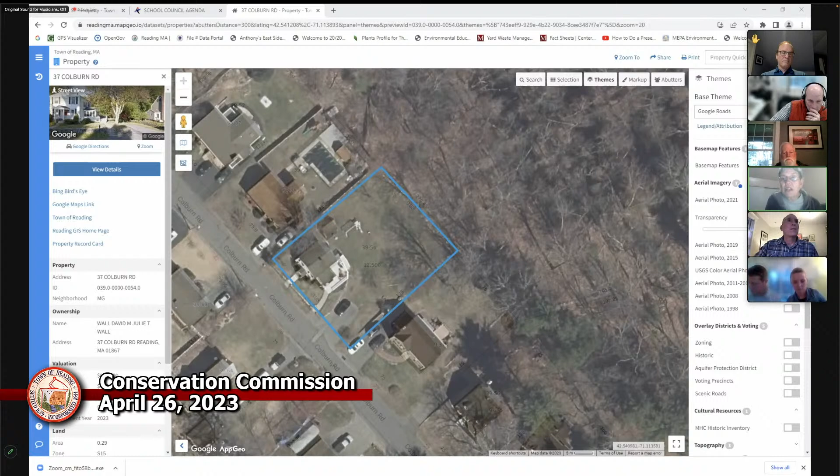So that takes us back to Andrew's question, whether normally that 25-foot line where you have marked it on your map, we would like to see native vegetation and not just lawn all the way up to that line. For existing properties, we don't ask people to fill that entire 25-foot line, but Andrew has a good point that if the wetland line really does go across that back corner of your yard, would you be willing to consider putting some native wetland vegetation there. Chuck has a list on the website of the kinds of vegetation you could pick from: shrubs, trees, etc. Sure, yeah, there's no issue with adding that. It would probably help make it look a little nicer back there anyway.

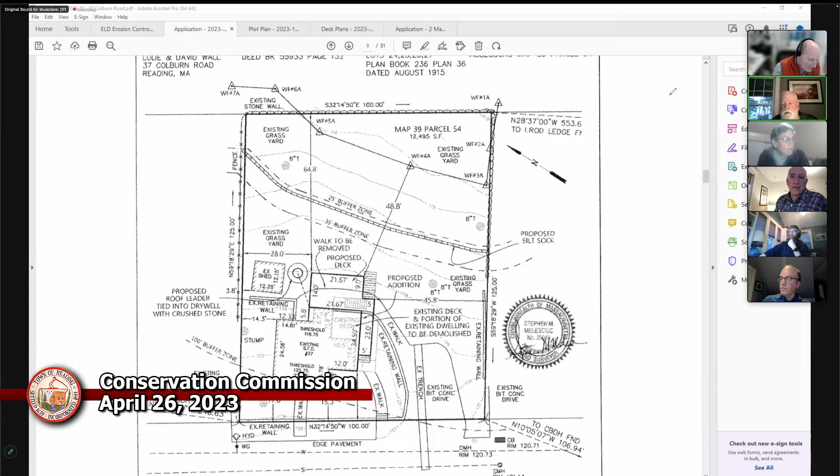Do we want to talk conditions for Chuck to write down before we vote? I have two trees, six shrubs, a mulch sock, and clean up all debris—Chuck, did you get the debris removal too? Yep, clean up the debris. Alright, so that's three conditions. They were planning the soil stockpile to be on the driveway, so let's tuck that into the mulch sock line—mulch sock following the topography of the yard.

Chuck: the only thing I'd add to this planting is to have the grass out there and the trees—you probably should do some ferns, shrubs, and trees, and try to create a habitat, improving on the lawn rather than just adding trees to it. I know there's a stone wall in between, but I think it would work in well. Maybe consider getting a herbaceous layer, shrub layer, and then the tree layer. Remember for the applicants that it's a wetland, so red maple would work, although we had a suggestion not to plant large trees—so maybe silky dogwood or something like that.

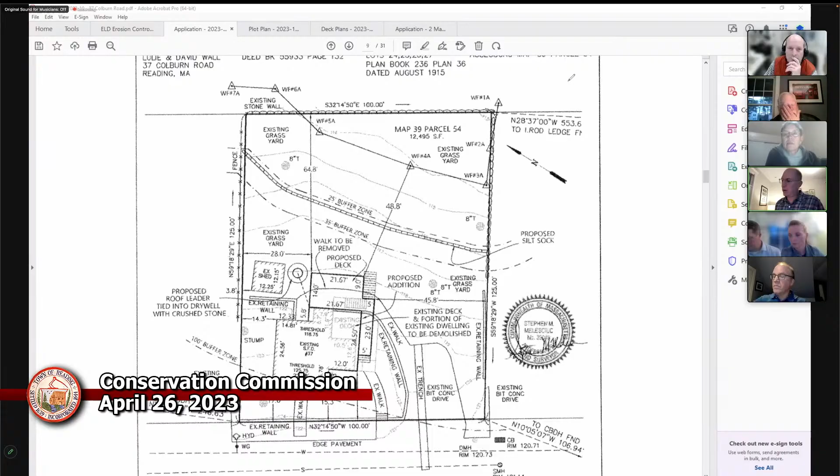There's a motion for negative determination, which is what would be needed to allow the project to proceed. Brian Bowe in favor. Bill McCants in favor. Andrew Driven in favor. John Sullivan in favor. Martha Moore in favor.

Okay. Oh, did we need to close the hearing before we had the motion on the negative determination? Typically you close the hearing first. Oh, sorry, I didn't catch that. All right, so anybody want to make a motion to close the hearing so we make sure we've got everything done properly?

This is Brian, I'll make a motion to close the hearing on 37 Colburn. This is Andy, I'll second that, to keep it simple.

Brian Bowe in favor. Bill McCants in favor. Andrew Driven in favor. John Sullivan in favor. Martha Moore in favor. Okay, so we have closed and issued a negative determination for 37 Colburn.

We went back in time there. All right, thank you. Not quite the order we were supposed to do it in, but we've covered all our bases now.

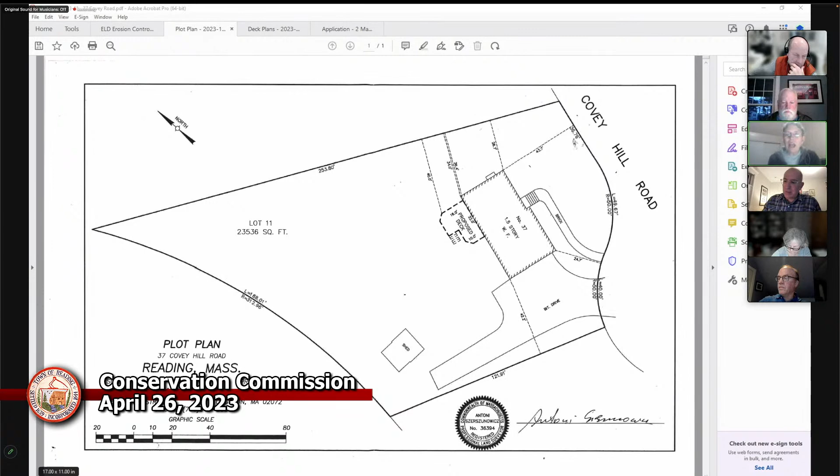One other thing, I noticed that midway between the place that says lot 11 and the shed, there's a large patch of an invasive plant called garlic mustard. That's something that is blooming now and is easily located, and it's an invasive plant that alters the soil. So if the homeowner had interest in keeping that out, this is the time of year to pull those. It's a pretty pesky invasive plant that takes persistence to keep from spreading.

Okay, anybody want to make comments on the project? Bill? Actually, first, just a question, Martha, looking at the plot map, about where did you see the garlic mustard invasive? Do you see where the shed is? Oh yes, and then about as far back as the shed, but coming straight back from the proposed deck, kind of out in that area. Yep, there's a big patch of it. Thank you, I was just trying to get a visual on it, having seen it on Saturday.

Also, one can't control the slope of the property, but I was actually very pleased to see how relatively flat it was in terms of any work being done in this area. You'd want the usual safeguards, but it didn't seem to me that this project was going to present the kind of risk that sometimes occurs when you have a steeper slope. But that was my only other comment.

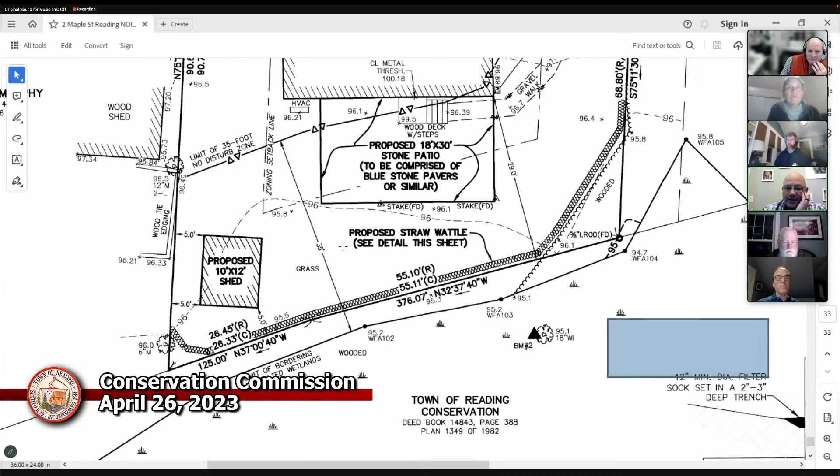I'm just going to scroll up a little bit. Maple Street is up here, this is the frontage to the road, the front yard, the house. There's a backyard, and in the back of the house is where we're proposing to do the work. This is a fairly modest house on a fairly constrained lot in terms of size. When John came to us, he told us he wanted to construct a deck on the back of the house and put a shed somewhere in the backyard.

Let me start with the resource area. There's bordering vegetated wetland down here, just off the property, and here's the property line itself. This house and yard was constructed in 1953, and it's grandfathered, or the formal term is existing non-conforming. The 35-foot no-disturb setback is up here, and part of the building had been constructed back in 1953, all prior to enactment of the Wetlands Protection Act or the town bylaw imposing these constraints. The entire backyard is maintained as turf lawn, and has been since 1953.

When John came to us and asked for the deck, we looked at zoning setbacks. If you can see my cursor scrolling around this perforated line here, that's the zoning setback. We wouldn't be able to do the deck without going to zoning for a waiver, since it's considered a building structure. So John scaled back his proposal and said, what if I did a stonescape patio in the lawn instead? That's what our proposal is today. That's not a structure, so we wouldn't have to go to zoning, and we could build it without considering that setback.

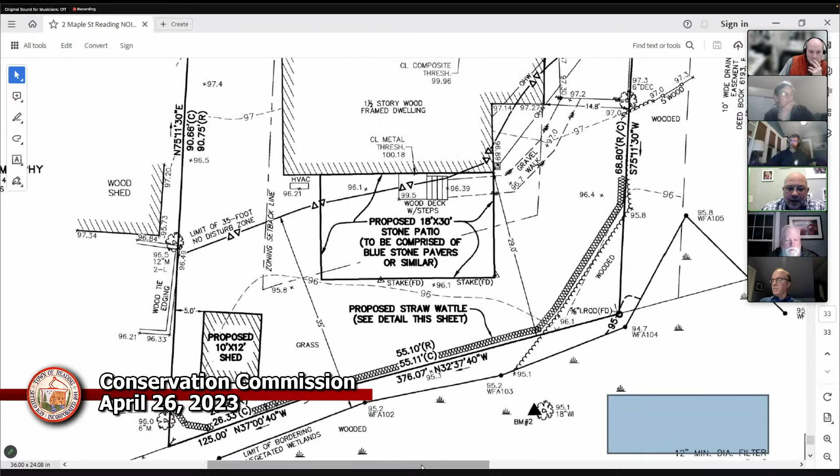Now, John does abut town-owned conservation land on the other side. In this wetland here, there's an area of Japanese knotweed. What we would ask is if the town would entertain some mitigation commensurate with the size of our project, to be performed on town conservation land, where John could support a small-scale project.

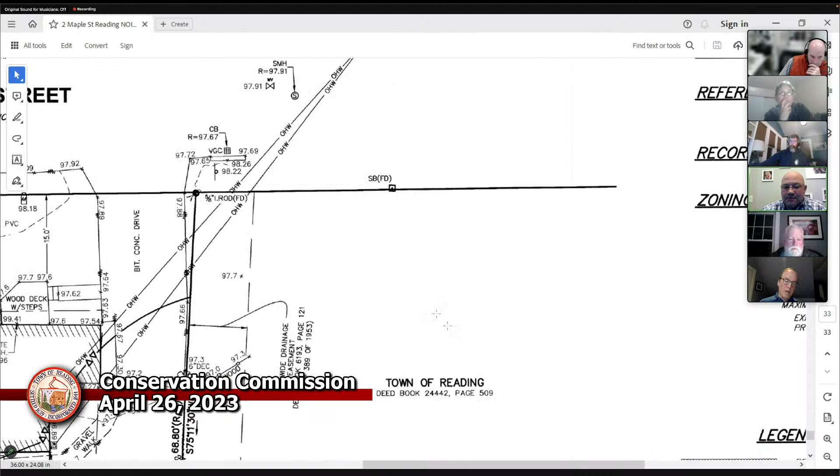I'm just kicking tires here, and I'm sure we'll get to discussion and deliberation by the commission, but the square footage of the patio is about 540 square feet. And if we consider the square footage of the shed, another 120 square feet, maybe we could offer 600 or 700 square feet of restoration on town-owned land.

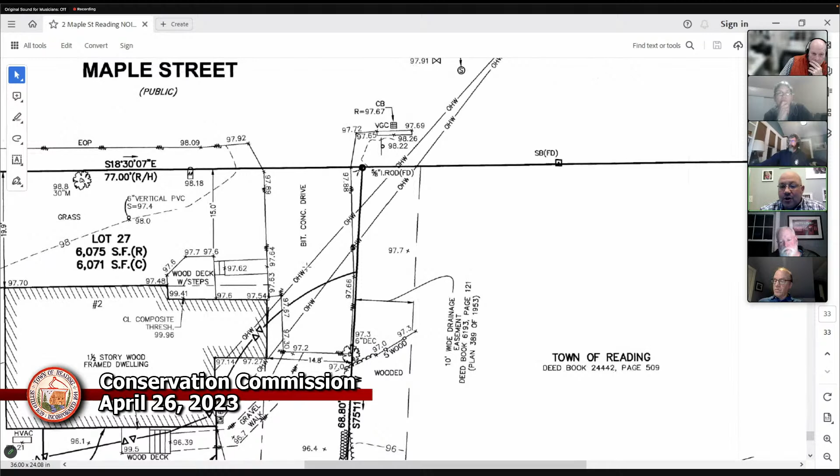There's also, up in the front of the property, a trail access that comes in off Maple Street. John, or Chuck, had pointed out that this was an area notorious for illegal dumping, that people were dumping material. John said he installed a camera on the side of his house, and Chuck asked if John may be willing to share video of people coming and going if they are doing illegal dumping.

John has pointed out, though, that the town did clear some vegetation here at the entrance. Since the town cleared that vegetation, the trucks no longer have a hiding spot to tuck themselves away, and John hasn't observed any dumping since that time. I don't know if the town has observed any dumping, Chuck, or if you guys have seen any.

But again, even at the trailhead, there's a really degraded area rife with invasive species that, if the town would entertain, we could carve out a 500 or 600 square foot footprint to remove invasive species and provide a native planting plan with native seed mixes, to the benefit of the town.

So with that, I'll turn it over to the Conservation Commission for questions and deliberation.

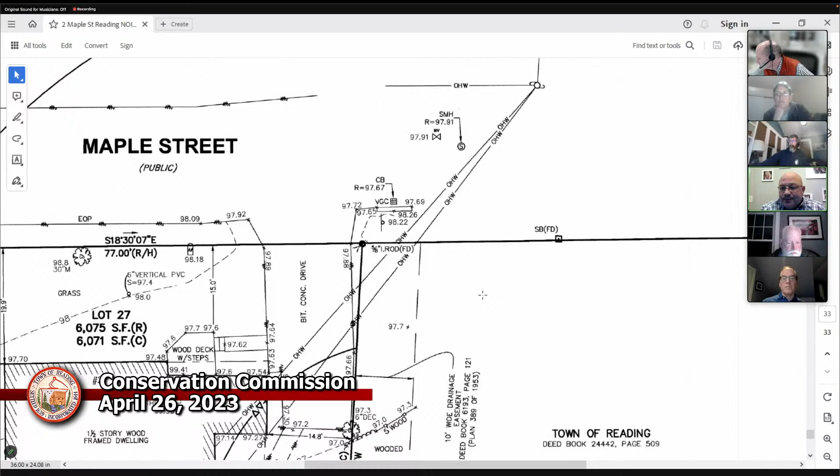Okay, again, people went out and looked at this property, and nobody was home at the time we looked, other than a dog, which made himself or herself known, but only because we could hear the barking. Is there anybody from the commission who wants to comment on what we saw?

Bill: So when I went on Saturday, actually John was there, as was the dog, a young dog, very enthusiastic. What I saw was certainly consistent with what Dave just described. This is a very small property, basically a straightforward lawn with fencing, directly adjacent to the Pinevale area.

And so then I was looking at our local regs just to frame this. As we heard tonight and saw in the materials, there was consideration of reasonable conditions, alternatives, and mitigating measures proposed. I think it's important to keep in mind when a variance is requested, the overriding interest, but we have to bear in mind that when it's a single or two-family residence, mitigation which improves the resource area quality may be considered to accommodate the public interest.

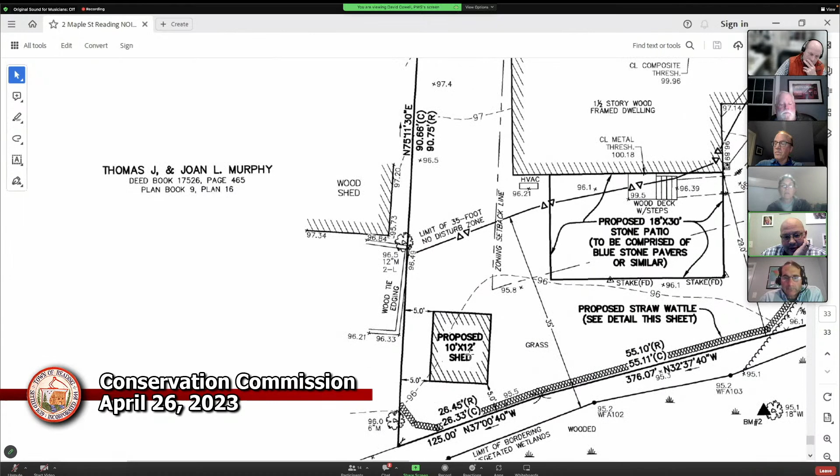In terms of the shed, yes, unfortunately I was working with one of my surveyors who did the analysis on this, in terms of what the setbacks and constraints were in other areas of the lot. She's not with us tonight. I can certainly go back to her and ask for an alternatives analysis of whether we can get in there. I would have to talk to my client about whether he'd live without the shed before going to zoning for a variance. That could be somewhat draconian. But we can maybe look at a reduced footprint too. Maybe instead of a 10 by 12 shed, he can live with an 8 by 10 shed and just shrink it a little bit. So these are all on the table.

In speaking to the ecological restoration, I didn't give a restoration plan with the proposal. The guidance I had given my client was that, given the fact that we're asking for a waiver and you guys may outright deny us, let's open the public hearing tonight and get feedback from the commission on whether or not you'd entertain it. If you said this was dead in the water, I could spare my client the expense of putting together a restoration plan. But if it's something the commission is at least entertaining, that gives us assurance to move forward with a restoration plan of some nature. I've always done restoration plans on our property before. I don't know what terms would apply here, but this is certainly to the benefit of both parties. Chuck, I don't know if you have any idea how we could collaborate, maybe do some survey on your side and put together a planting plan. Again, I don't know where liability falls or stuff like that.

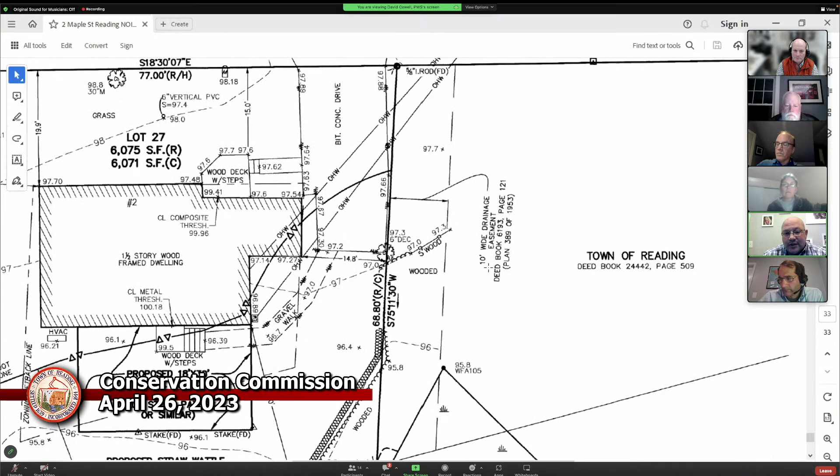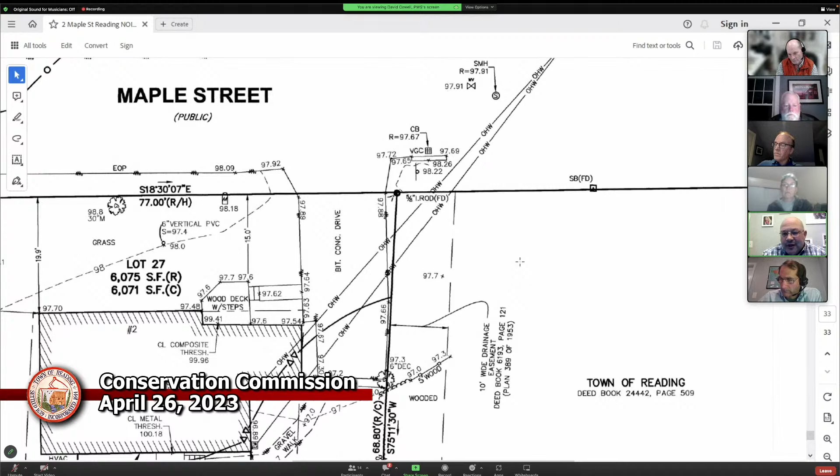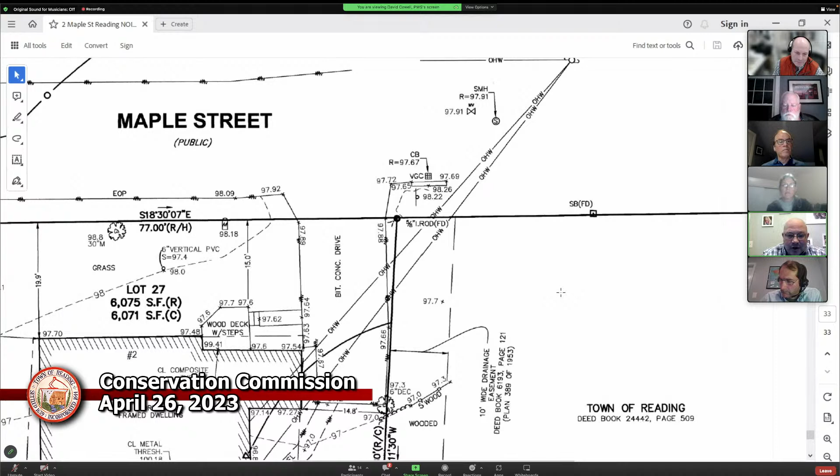It's all with best intent to remove invasives and plant it with natives to create habitat, as Chuck said. Preferred, as you implied, the Japanese knotweed, I don't want to touch that. I'd prefer to, if this is 500 or 600 square feet of work, give you 500 or 600 square feet closer to the trailhead where there's a degraded area. I had some site photographs, but the town, I think, cleared some of the vegetation but didn't replant it, and it's regrowing with invasive species, and it just looks really degraded. I would be able to put together specifications for removal of these, and they're easier to treat than Japanese knotweed, which, as you implied, is really, really hard to work with. Up here it would be multiflora rose or Asiatic bittersweet, species that are more manageable than knotweed. Put together a native planting plan, complete with native seed specs and herbaceous species, and offer that. So that's where we were headed with it.

Okay, so if I can jump back in there. Yep, please do. So, from my perspective at least, the shed placement and size, the shed issue is a non-starter for me. That brings us to the patio.

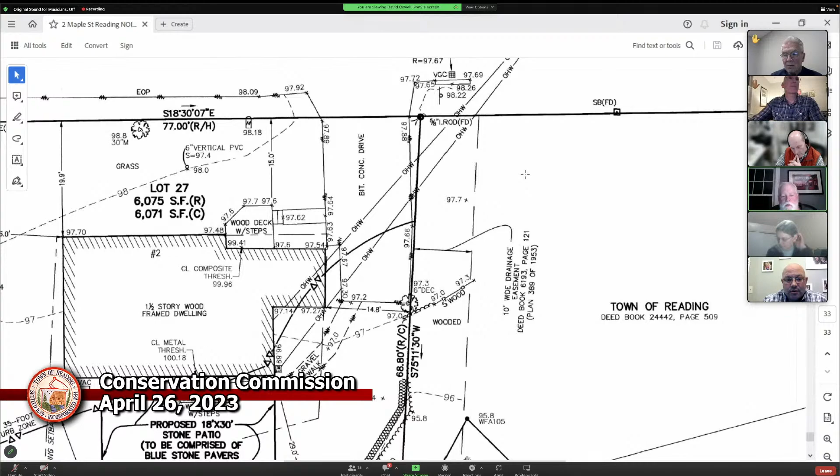The patio, I could see my way towards approving if there was sufficient mitigation. I did say the Japanese knotweed was intriguing, and it is. You're talking about doing something up front where it was cleared, that's also interesting to me. So in either one of those cases, I would say I'm open to you coming back with a plan, and if the plan is sufficient in size and what have you, then I would consider that acceptable mitigation for the patio. But again, for the shed, no, the shed's gonna move up, or smaller, or both.

All right, this is all your comments, they're helpful. This is exactly the type of feedback I was hoping to get from members tonight. Thank you. Okay, I'm gonna jump in before I call on Walter.

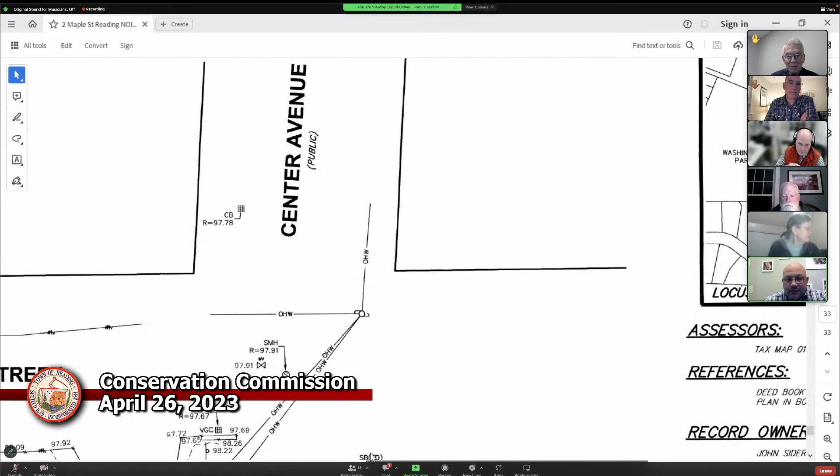Okay, how long ago was that wetland line delineated? That was done last late summer. Usually we carry the date on the site plan. Let's see if we actually have it on here. Limits of bordering land - oh, it was a fall delineation. I did use the soil auger a lot on this one because it was turf lawn at the edge of wetland, so I was looking at soils more than I was looking at vegetation at that point in the year. And you're the one who did that delineation? Yeah, that was my delineation.

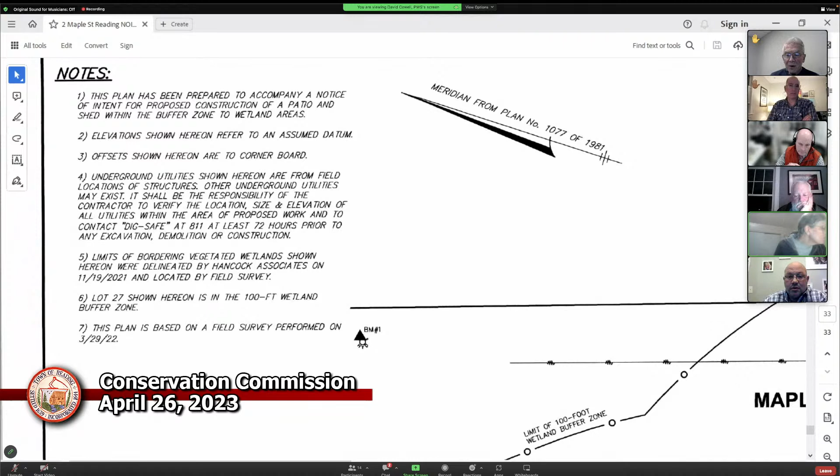Okay, because at the moment, where you have the shed drawn on the plan, there are 2 skunk cabbage leaf clumps between the shed and the property boundary of the neighbor, Murphy. So, you know, I agree with Brian that that's really not an appropriate place to put a shed if there's skunk cabbage growing in the area where you're talking about putting it. And there also is skunk cabbage just off the property, but inside wetland flag A100, and there's skunk cabbage inside wetland flag A104.

Okay, so how prevalent is the skunk cabbage? Is it a dominant species, or are there other species growing with it, or is it just, you know, there are going to be outliers? There's going to be, you know, a dominance of wetland vegetation if it's hundreds of skunk cabbage coming up behind it. In any case, I'm happy to go back out there and look at it and revisit it. But yeah, it has to be dominant - if there's 2 bunches of skunk cabbage in a lawn, that's not necessarily dominance.

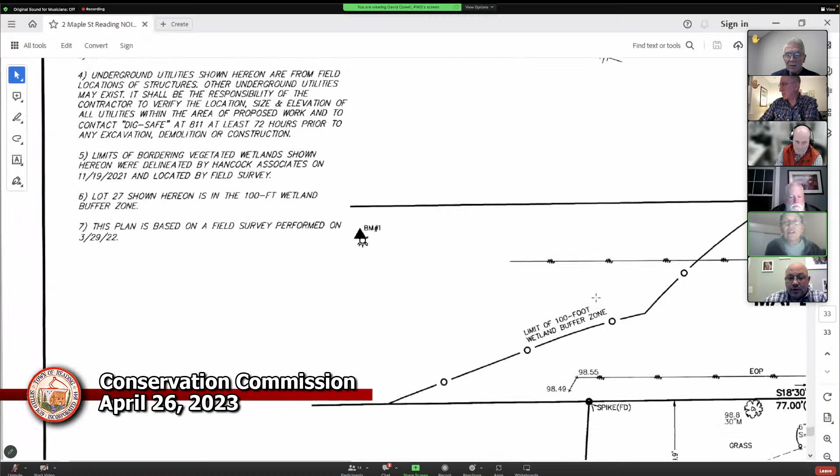Okay, I would say the 2 corner areas near wetland flag A100 and A104, my memory was that was pretty heavily skunk cabbage. Okay, yeah, the 2 lone outliers up near your proposed shed - if you're saying it has to be dominant skunk cabbage to count as wetland, that probably would not count as dominant, they were just random separate clumps. Yeah, but these are where wetlands abut manicured lawn, it can be challenging. That's where the soils come in.

I did this in November relying on soils, but I have no aversions to revisiting the site and adjusting our flags accordingly, now that vegetative species emergence has come out, so I can nudge these lines to reflect that.

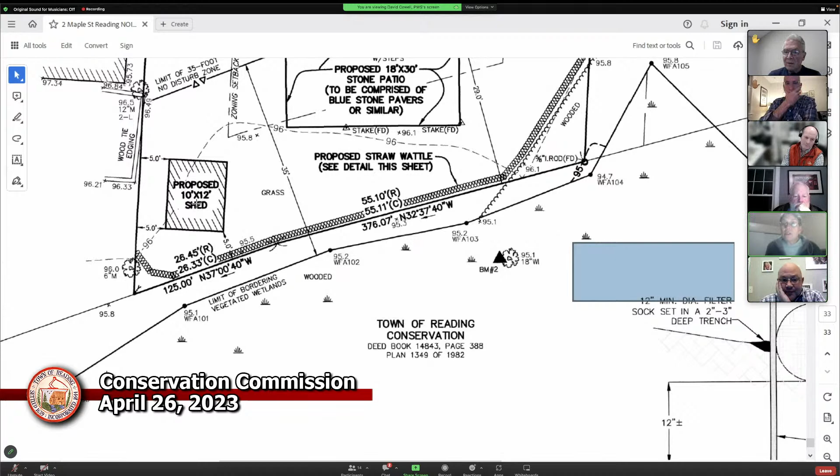I think I'm going to agree that I would need to see the shed moved outside the 35-foot zone. And if you have to nudge the wetland line, that nudges where the shed can be, much closer to the street.

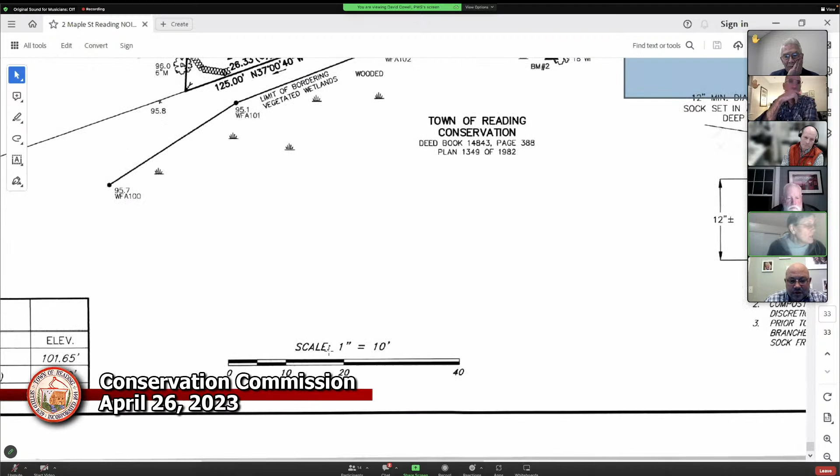I used my handy dandy ruler and the scale on your plan and measured from your existing wetland line to the corners of the proposed stone patio. At the closest corner, it would be about 15 feet from the wetland line, and at the farthest corner, 21 feet. So both of those take it within the 25-foot zone, which is supposed to be a zone of natural vegetation.

Sorry, forgive me for not asking that. I knew there was a 35-foot no disturb and a 25, but I didn't understand the difference between no disturb and natural vegetation, and why they're not the same. The 35-foot we generally consider to be no structures.

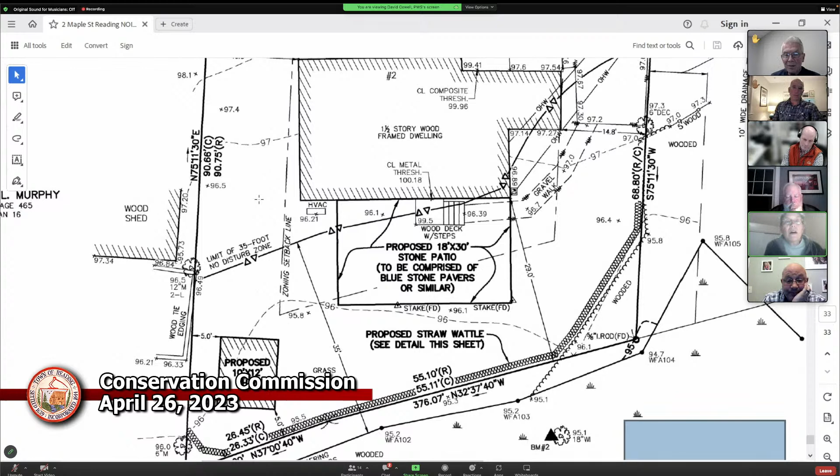So a patio counts as structures. Yeah, so we'd need to be talking mitigation for the patio even within the 35-foot zone. The 25-foot is supposed to be the zone of natural vegetation.

Well, I would ask the commission to consider that it's existing non-conforming and he has lawn to the limit of lawn. So it's lawn in the existing condition and it will remain as such even if we didn't do the patio. You're not losing any native vegetation there.

Understood. But I'm reluctant, even with mitigation, to have a structure go into that 25-foot zone.

So I'm going to ask if Mr. Sideropoulos might possibly consider a smaller patio that would stay 25 feet from your wetland line that you've drawn. It could be like a 12 by 30 patio rather than an 18 by 30 patio, for example.

I'm just trying to, I mean this isn't to scale and I'm terrible at drawing, but I'm just trying to see what a possible 25-foot line would do. I don't know that's the exact scale, I'm just approximating 10 feet and carrying a 10-foot offset.

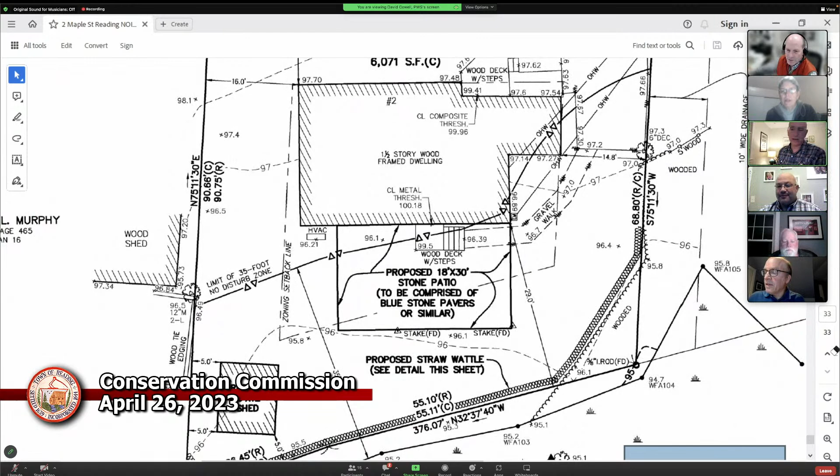Okay, so just to cut in for a second, we do have Guy Federa and Thor Akerley here to talk about the extension request for Lakeview and Eaton. So maybe we could move things around and get that on next. Okay, I'm happy to take that next. We'll get Guy and everybody on site.

Good evening, everyone. Thor Akerley from Williams and Sparages. Guy and Joe, the property owners and project managers, are here as well from Eaton Lakeview Development. At this point, the order is set to expire in late May - I believe it was May 24th. The original permit was issued back in 2019 for the construction of 12 townhouses and a multi-family large apartment building on the Lakeview side of the Eaton and Lakeview intersection. If you've been out there at this point, the townhouses are essentially done. We've been monitoring the project for Guy and Joe for the past almost 4 years now - feels crazy to say that.

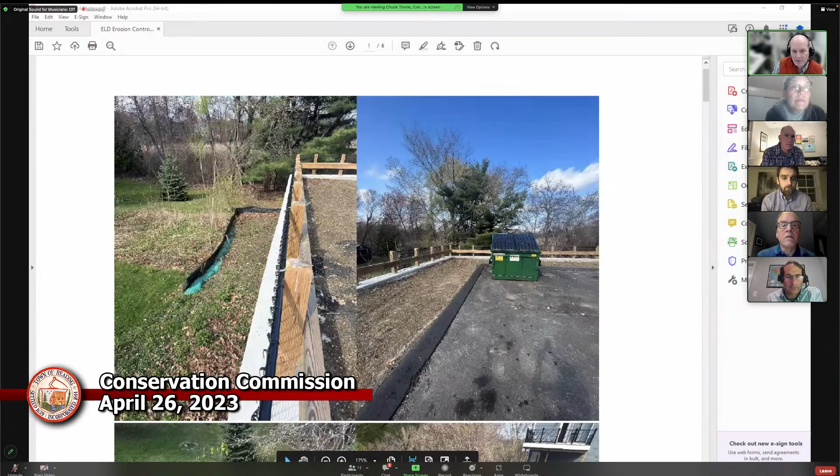Thor, if you don't mind, Guy sent me some pictures earlier today. I'm going to run through them - if you have any comments, just let us know. This is the site. Guy sent these to me. I think what they're doing is trying to tidy up the site, general conditions of what is typically out there from the reports and from my site visits. I don't know if anyone's familiar with the site.

There's the retaining wall that's in back of the units. And this is kind of like a runoff area before it gets into, maybe 40 or 50 feet before it hits Walker's Brook there - 40, 50 feet of pretty much Japanese knotweed and other invasives entangling all the trees.

Here's another area of what the site looks like. As you can see, the lawn hasn't been fully established. Chain link fence in place, the silt fence looks intact - it may not be needed on the left-hand picture anymore. It's running down the back of the building along the retaining wall, and this is an outlet structure, kind of a velocity box there to make sure that there's no scouring heading into the wetland area just beyond, I guess, just beyond the erosion control, but certainly at least 25 feet into the woods there.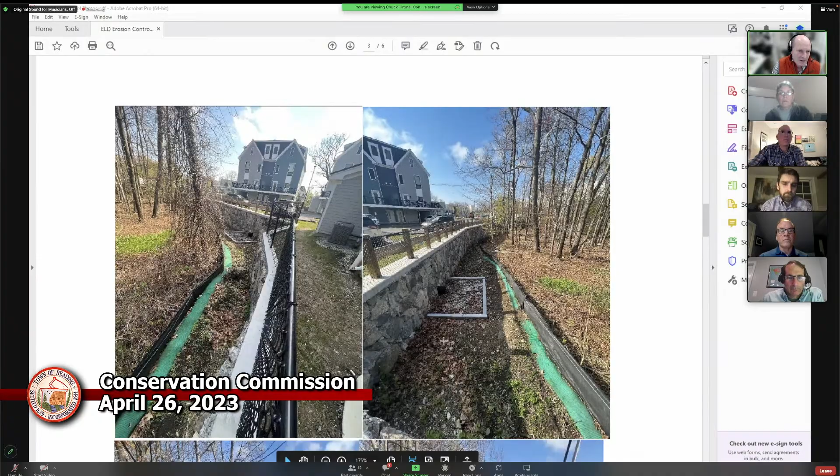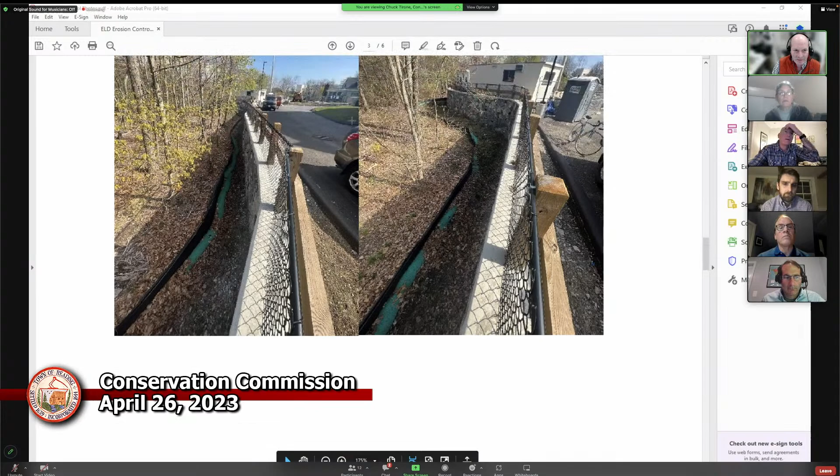Here's a construction trailer and more of the retaining wall, the erosion control, silt fence behind that. In these areas, now that the retaining wall is up and everything is paved with established grass, it may not be needed anymore.

I assume this is the new side. I can see the wetlands coming up. This is probably where Bank of America is, up on top of the Home Depot retaining wall.

We're looking at 12-inch mulch sock and erosion control fence, and this is certainly along the new side where they are about to start. There's what I'll call the Home Depot retaining wall, but it's more by the Staples area and Oye, the restaurant.

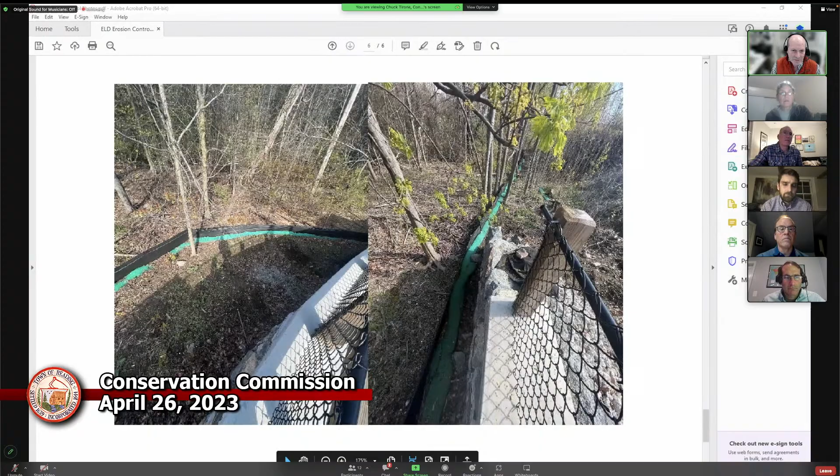A little fill going on. This was historic fill in this area from the previous owner. And the retaining wall. And that's it.

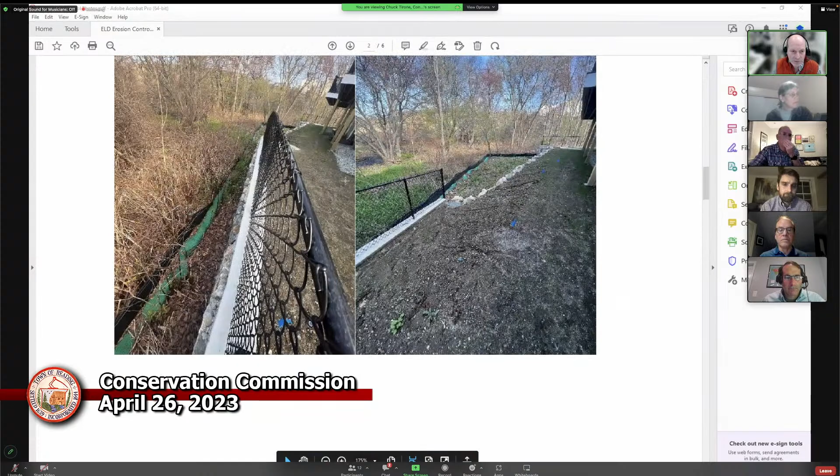I don't know if anyone has questions on those specific pictures, but I just wanted to let you see the site and how it looks if you hadn't had a chance to get out there. I would say it's been kept up well through Thor and through the owners and through the developers. So seeing none, I'll stop sharing so we can have our discussion.

Chuck, would you think this would be a place that we should have a site visit before we finish our vote on this question?

This project has been pretty much managed by the Conservation Office and Williams and Sparages through Thor. And Brian went out there once when we were, I can't remember why, for compliance or sign off or something like that. Brian, can you help me? We actually went out there because Guy wanted us to do a quick assessment to be sure they were on the right track, so if there were going to be any issues, they'd get early attention.

I also think the timing, being less than a month from the expiration date and the requirement to get it to the commission 30 days prior to that expiration, may factor in. I personally, if you haven't been out there, don't think it's needed. The townhouse area visibly, through those pictures, looks in fine condition.

The whole place, the disturbed area, is protected by a retaining wall, and nothing happens beyond the retaining wall, and that's constantly looked at. So the truthful answer to your question is you do not have to continue to take a site visit because I don't believe there's anything to find, but we'll see what the rest of the commission thinks about those statements. Okay, Bill's got his hand up.

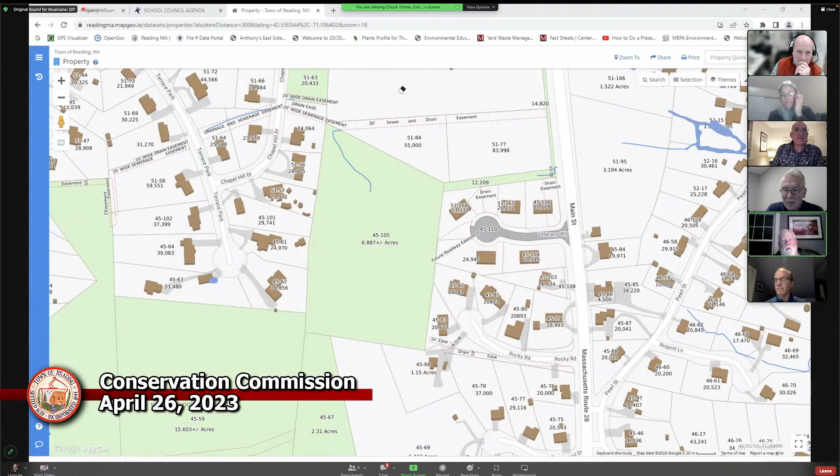Yeah, and the wire has little flags along it indicating the location. So the order is we should go out there to verify that it's still there, and if it is, it's time to go to the front door.

And then as a third fallback, we can get Andy to put on some face paint and go out there at night and cut it. If you cut it, they'll know immediately because an alarm will sound in their house. Oh, what a shame. Who did that?

The sign is at the bottom of the mailbox that you just scrolled past. It might not be there on Google Maps, but I sent you a photograph of that mailbox with a sign at the bottom. There it is, I see the blue right there.

Suppose we should knock on the door before we cut the wire. We're not going to keep cutting the wire, we're only kidding. I don't want you electrocuted, Andrew, we need you on this commission. You guys are funny, huh?

Do we want to do anything about the MAC Environmental Conference or put off that to another day? I have one ready, but I'd just as soon put it off to another day. I want to try and catch the end of the Bruins game.